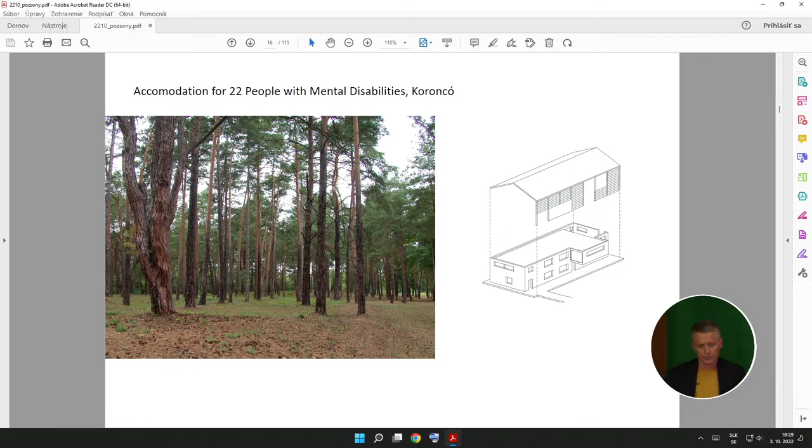Here you can see the floor plan, a very simple one. We have taken the porch and extended it into the height, so it's 2-story height. And we even made some distinctions - for example, a protected one with a lattice in front of it, and a semi-protected and a not protected space.

It is quite interesting to see that people have used the protected space in a different way, and the not protected also a different way. And we did a small thing - we put here a commando station, the living room, so people could watch the other ones, what is happening there. So it was quite funny. I have to tell you that after 10 or 15 years, the building has been exactly the same as what you see here, so people have cared about their building very much.

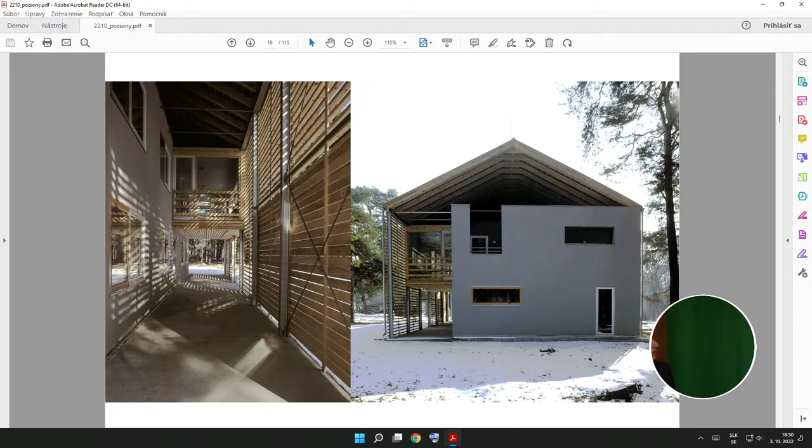Here also are still modernistic features, let's say, or we said no to the pitched roof. We have some kind of abstract element, but here the porch and this roof is quite different. So the goal was to do something different out of traditional elements. And this is how it is in the small forest. The second one is a competition project.

We haven't won. The day after we got up and did our business again. We did a third prize.

This is a deportation memorial for people from the Great Plain who were deported in the 1950s, and these are sheep yards - not exactly the sheep stables they had, only similar ones. They had different proportions, but the texture and materials are the same - that's thatched roof, actually. What we've done is alienate the form of those stables into a different one, but still keeping the same material, very simply.

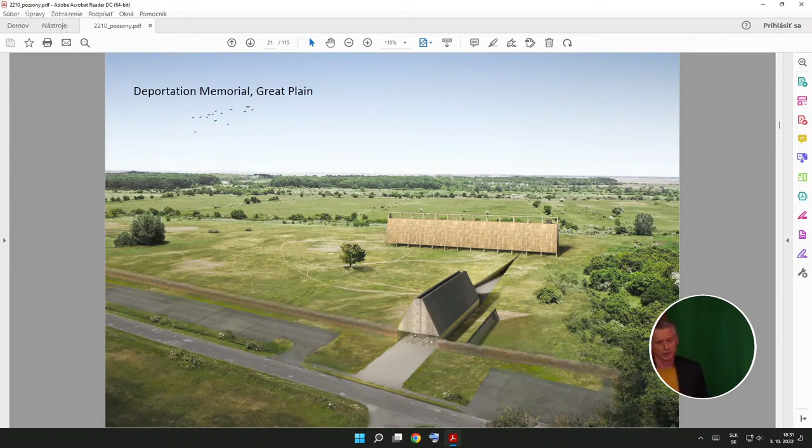What the jury said later - I had a friend in the jury, and he said when he knew that we had done the project, that we were actually first, but then they said no, it goes underground, it's very expensive. So we came back down to third position.

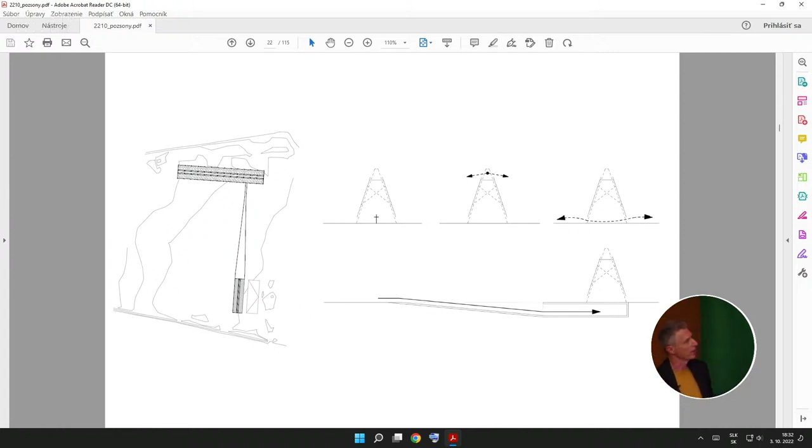So we have this building, and this part is actually an exhibition area, for just thinking, just remembering. And we have a technical building for, let's say, toilets and things to buy, and also a restaurant here.

And here you can see the section with the exhibition area. There's also what was questioned, an outlook, which we didn't understand, but you can go up and have a very nice view of the plain. You know what is about a plain? Nothing. There happens nothing, actually. But you can look out and see the nothing.

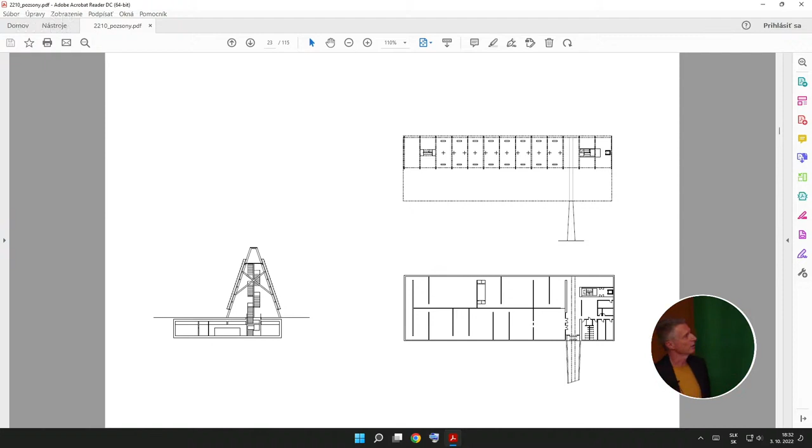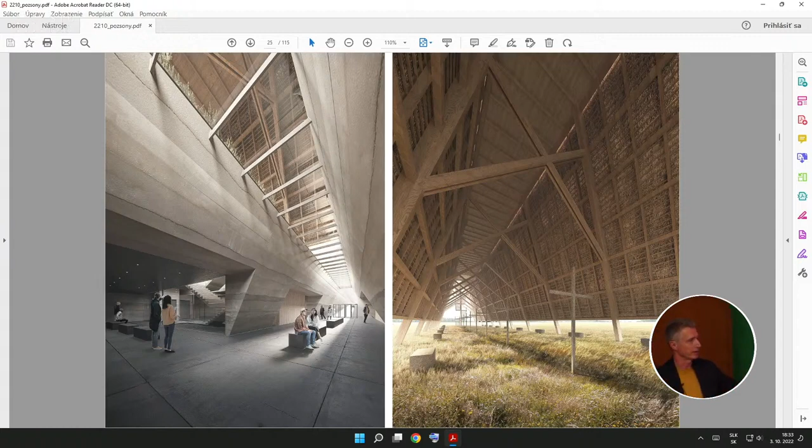And what we have put - this is our object, because it's rather an object - what we've put here is actually these crosses. We had 12 crosses because there were 12 such stables, not villages, but smaller plots with such buildings, with people who were living there.

And actually there was no railing, no guards, and they didn't flee. You know why? Because they couldn't go anywhere - everybody was afraid to take them in, to let them into their houses. So it was really a very bad era at that time, the 1950s, between '50 and '55 in Hungary, where people were taken away from their homes and put into such shelters.

Sometimes with their families, sometimes alone. And the reason, of course, was that they had some land before the Second World War. There was a very simple economic reason, because there was a shortage of workforce on the lands, and in such a way the state could have workforce in the lands.

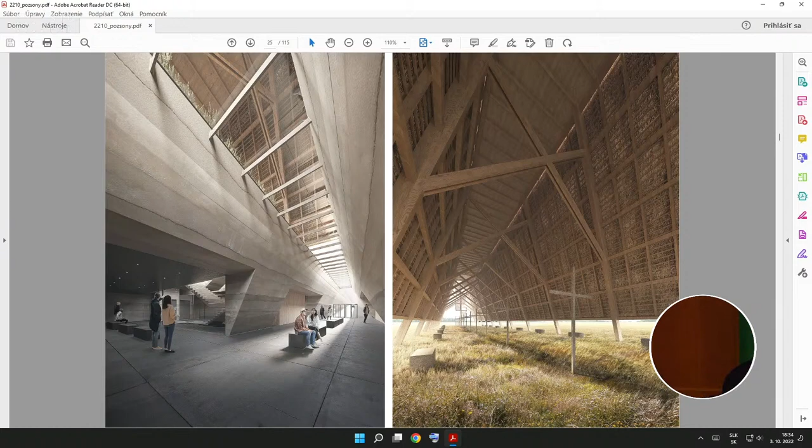And this is the reception area, the same form but different materials. Yes. The second topic for us is the intermediate spaces.

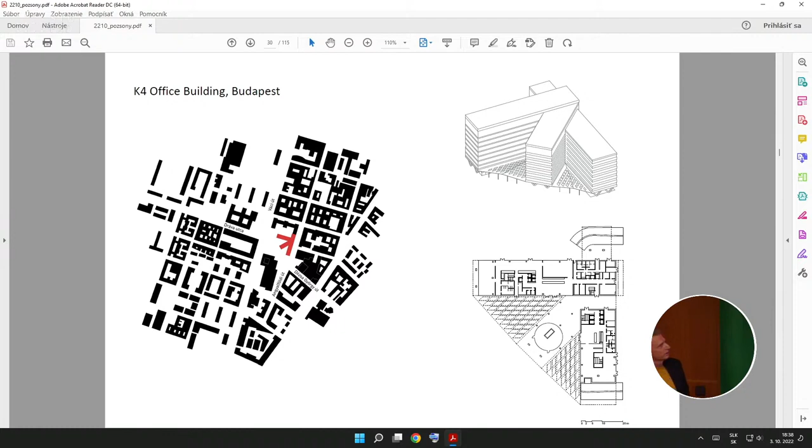It was actually the conspiracy with the chief architect, who said he needs this canopy. And we have done this canopy out of reinforced concrete, but with some holes in it. I'll show you how it looks like. This is the third element of modern architecture.

Now we come to our era. This is parametric design. It was not a conscious thing for us, we just started to play with it. Here you can see we have these rhombus holes, and we have the same holes on the bottom of this plane, but on the top it's always different. If you are at the edge, they are smaller because there's too much light, you need more shade. And if you come to the end of the canopy, they get bigger because you need more light. So it is a kind of design tool we use because it is needed, it has some sense.

And some very nice things we have developed in the meantime, that we have some indirect light, and these tilted surfaces are lit from the vertical surfaces. But you can see here.

And again, another topic, the context, this modernistic context. We have actually a building from the 1970s, which has been demolished since then. That's the usual story, that these buildings have no value. In my eyes, they have value, and actually our building was a reaction to it.

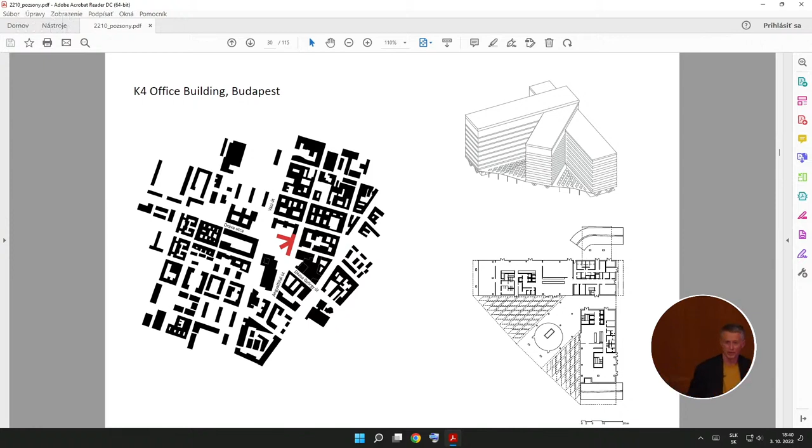Funny enough, the investors want to sell their product, so they call it vision towers - this is tower 1, tower 2, the 3rd tower. It has nothing to do with tower. But the reason we have used different heights of the ribbons is that they want to make it different. We thought about how you can make these towers different. A very simple thing: you have glazing from the floor till the ceiling here, from the parapet to the ceiling there, and here quite a normal one, a cheap one. Of course, this is for KPMG. This is for the cheap clients.

It's quite funny that architecture can be ironic. This is full of irony. So think about irony when you make your next project.

Okay, this is a quite interesting project we have done. It is an invited competition right now, we have won it. But since we have a problem with our economy, everything has been stopped. There is a shortage of workers, manual workers, masons, plumbers, and so on.

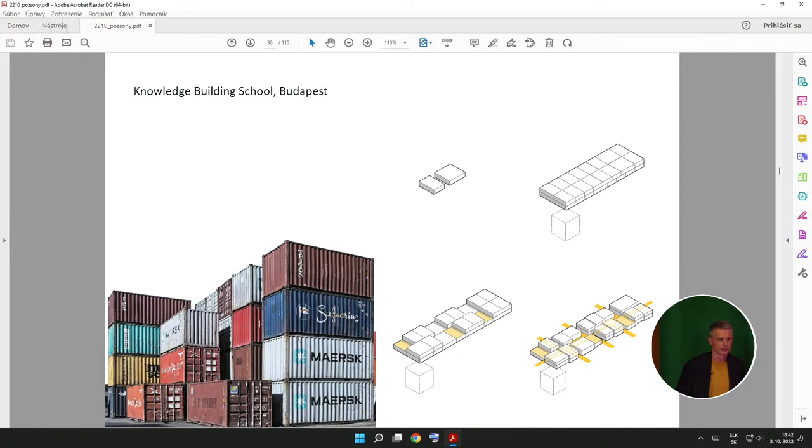Some construction firms, the big ones, thought, okay, we are going to make a new vocational school, called the Knowledge Building School. They made a competition for that, and they need finance from the government. We didn't think about it at the beginning, but we have done transitory spaces here. The very beginning idea was that we use something these people are going to use during their whole life - these containers. You can imagine a construction site with a lot of containers, with people sitting there thinking about how to construct it more effectively or more quickly.

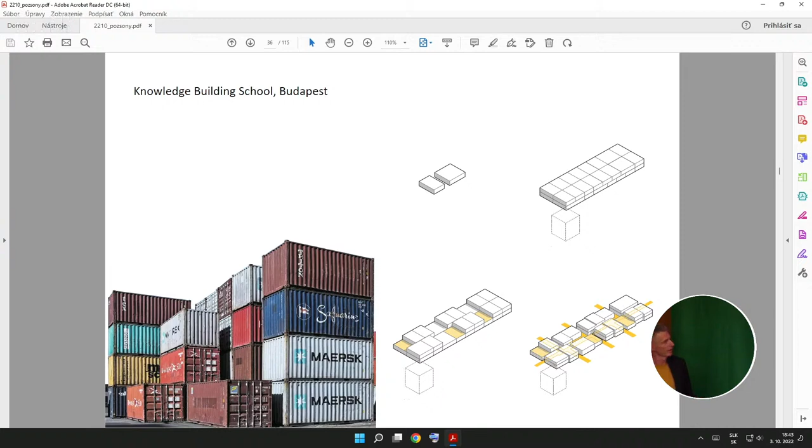So this is actually the beginning of our idea. We put all these containers together, like here, then took out a few, and pulled them apart. These containers are actually classrooms, office rooms, and downstairs we have workspaces. They are not the same size, not at the same line, so they are not real containers. If you built a container city later as on a construction site it shouldn't be like that, but they are learning how to build containers.

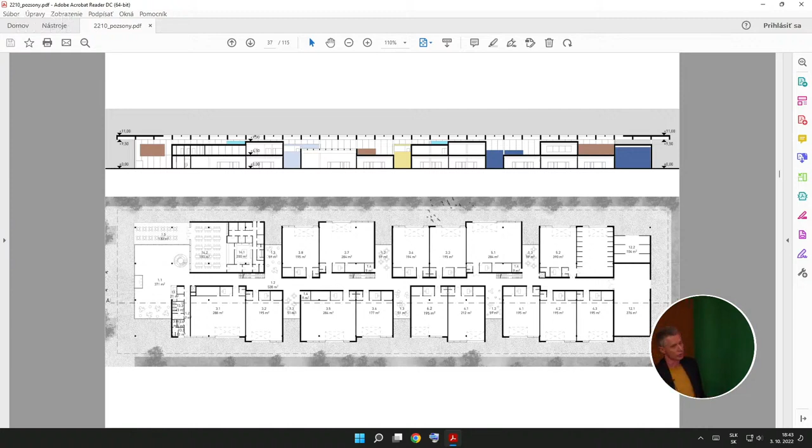And here you have actually an axis and smaller voids or rooms where they can chat with each other. In the height we have also a kind of play of intersection, what you can see here.

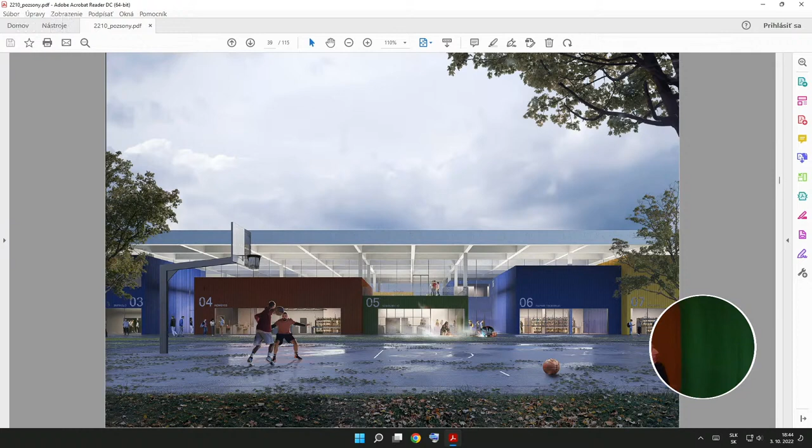And of course they needed a students' hostel, and this is a separate one. This is a very dramatic picture. Now we have come to the idea that if you want to win a competition project, you always have to make a dramatic picture. It is the 30th of June in Budapest, a huge thunderstorm you see here. The sun goes down. People are happily welding here because they love their métier, their future métier. Then these are basketball players, and these are some rather on the theoretical part and so on. You have wonderfully lit spaces. Perhaps this was the reason why we won the competition, I don't know.

This is the intermediate space where you can go through, and actually you always have different colors. These are corrugated steel panels or colored steel panels, and you have really a very varied situation with stairs, with voids, and of course to know where to go, which is your classroom, there are numbers and colors. We still have the hope that this is going to be built.

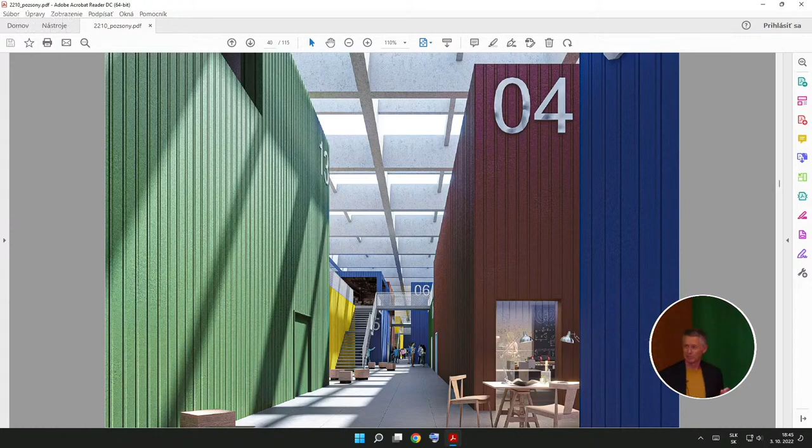The next project - I said last time during the lecture that this was an ideal procedure. This is the University of Art and Design, Moholy-Nagy, where the program was very well done.

I think it's very important that you have, as an architect, a very good program. If you have a very good program, then you don't have to think about architecture because the program leads your hand, actually. It has so much input that you have a lot of inspirational ideas. They had a special committee called MOME Laboratory, and they worked for 3 or 4 years to compile a program which actually contains the future of the university, a vision of the university, how it's going to work, what kind of challenges they are having, and so on.

And on the basis of this, there was - we say international competition, but all the international competitions in Hungary are national competitions because everything has to be submitted in Hungarian, and everything is thoroughly done, it's the same as in Switzerland, and I don't know how it's in Slovakia, but all over the world. So it was a competition, and happily enough, we won it, and on the next day we still had the winning entry, and funnily enough, we were commissioned. We were happy. Actually, I made my doctoral studies at this university, so I had some connections with the people. I knew them, and actually we started to work before we had our commission. So it was a risk commission, I would say.

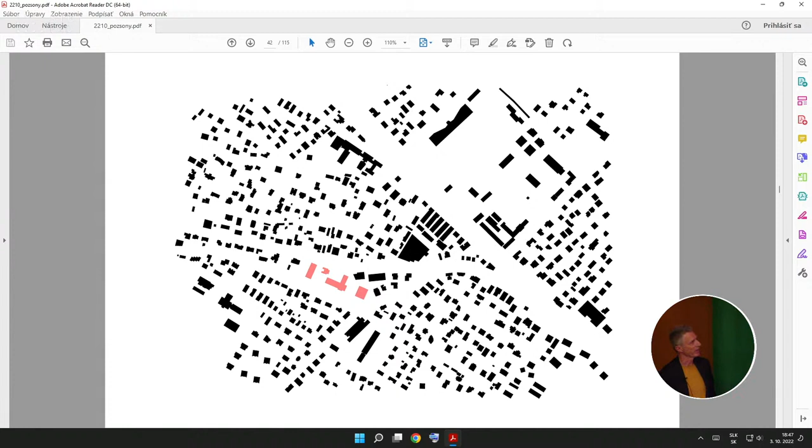And we had a task of making 3 buildings. One of them is existing. The other one too. Altogether 4 buildings. You can see the change of scale upon this building.

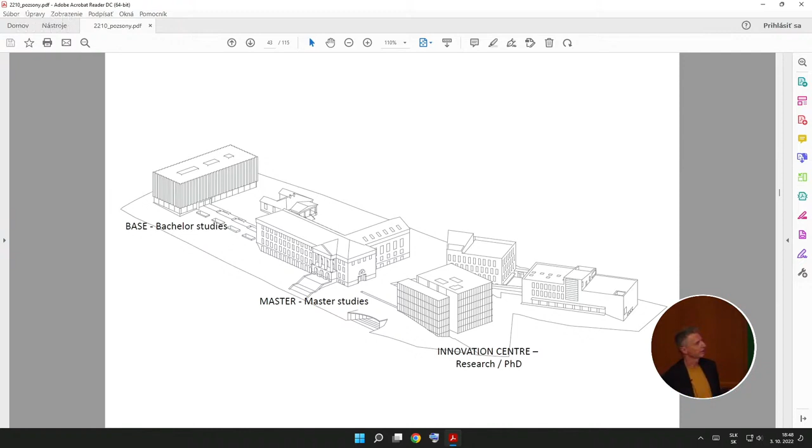This is a classicist building from 1840 or something like that, and there were just vineyards around. Then slowly a lot of buildings, bigger buildings and so on. And this one is the former People's College, built in the 1950s, 1953 as far as I can remember, in socialist realist style. I don't think I have to speak a lot about socialist realism in this building.

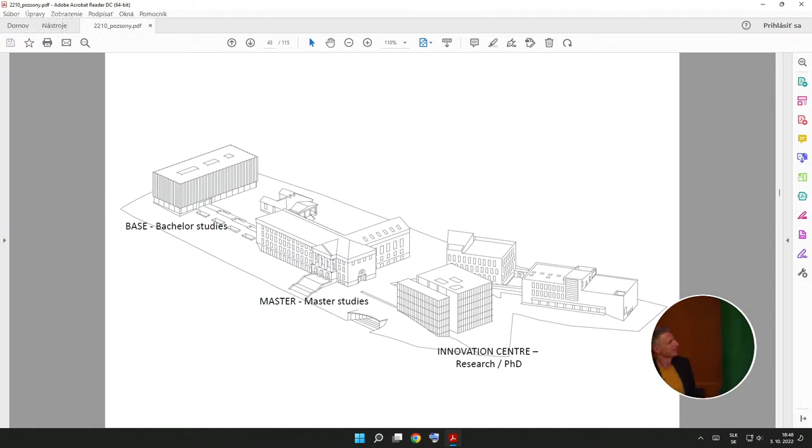And it has been also the home of the university for a long time. Then, according to the original layout, there was another building here, which was built, and another building here. It had to be demolished because it was in very bad shape and not quite well used.

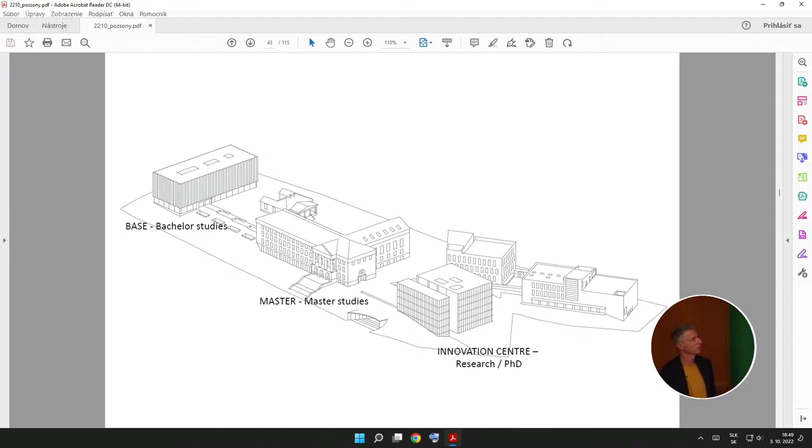And we had to extend this building with three other buildings: one for bachelor studies, one for master studies, and one for PhD studies. How we won was that we connected all the buildings with one axis, and they were connected also underground, because if an art student has something precious that has to be photographed, they could do it here and bring it elsewhere easily.

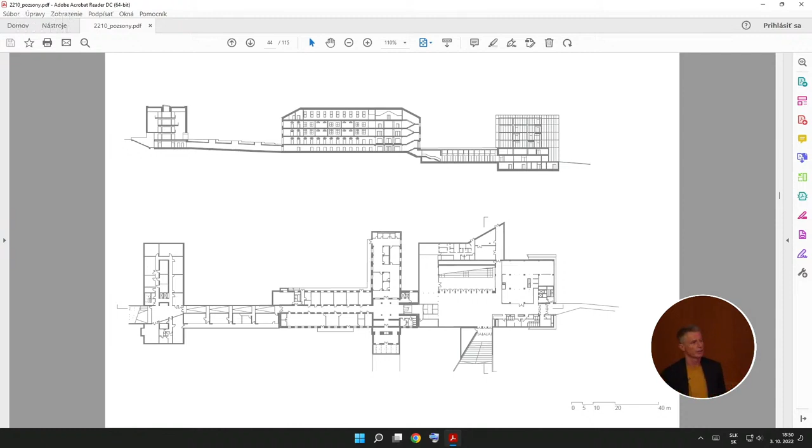There are two technical buildings already existing, so it's very practical if you can go through the building in a covered area. Back to our theme of intermediate spaces, this is actually a series of spaces, spaces of encounters on each side of the building. It's like a pulsating small city where you have small piazzas, small streets, and the chance to speak with people, meet people, and exchange ideas.

A very small detour. In the 1950s, architects were forced to make socialist realist buildings, but they were actually educated in a different way—they were modernist people, and they tried to find a way out. During the Second World War they were students or had almost finished their studies, and for the last years they went to Scandinavia, either for practical studies or normal studies. They were really infected by Scandinavian architecture, and how it started in Hungary was actually a very Scandinavian-influenced architecture.

I'm going to show a few other pictures later. This goes back a bit to Scandinavia, but also to Hungarian rural architecture—a very simple building with classrooms on both sides and a corridor in the middle. And we have turned everything upside down later.

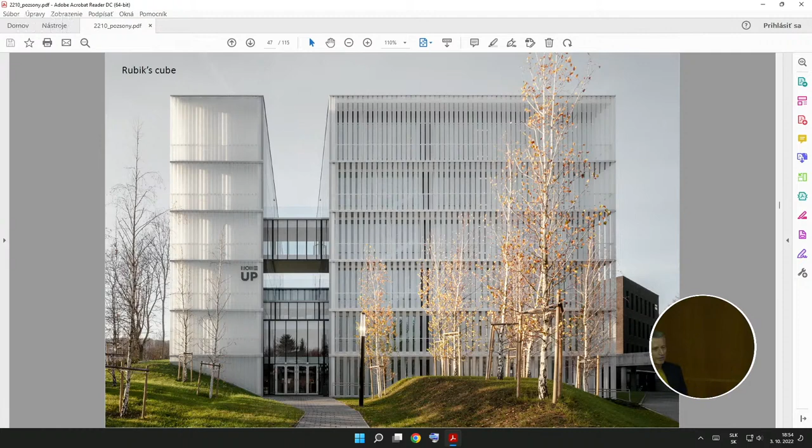And then we said, okay, we have something to do with these guys, with these important figures. We said, one building—this is the flagship building of the university—is for research, for the vision of the future. We said, okay, we make a cube, and you can even turn it, like a Rubik's Cube here. And this is actually the axis: you enter the building here, and you go along an axis, with these smaller piazzas and everything.

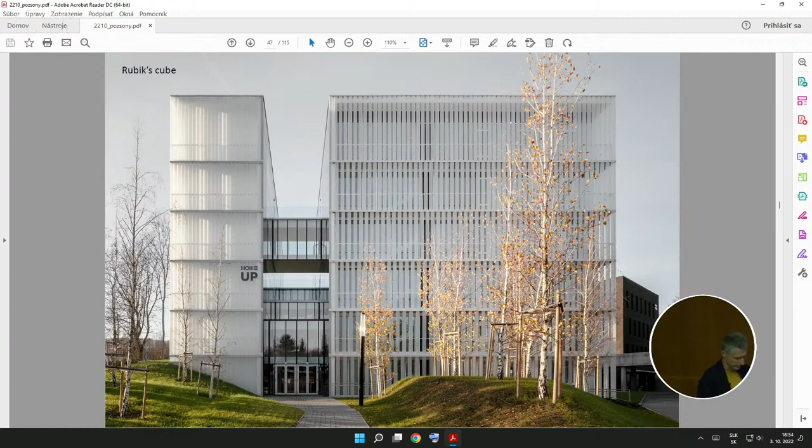What is following this axis? And the second one—we use this building again for Moholy-Nagy, referencing his light experiments.

He played a lot with natural light and artificial light, and with blurring of different objects, this kind of blurred vision. And we try to use the same with these cast glass elements.

How these elements reflect light, how they let through light in different light conditions, in different seasonal conditions, and even one mathematical play, what you can see here a bit, that we have smaller gaps upstairs, and bigger gaps downstairs. It's again because of light, to get more light here because there's less light here, and to have less light here because there's more light from outside. I hope you understood what I said. It's a bit complicated.

Our main concern was how is it from the inside, whether you can see, what can you see from the inside. Our brain is wired in a way that you can feel the whole thing through small slots or gaps. So everybody inside the building can fully enjoy the outside nature and the outside world from the inside. These are some amazing images for me, because I haven't thought that this building, a very simple building, has so many faces, let's say.

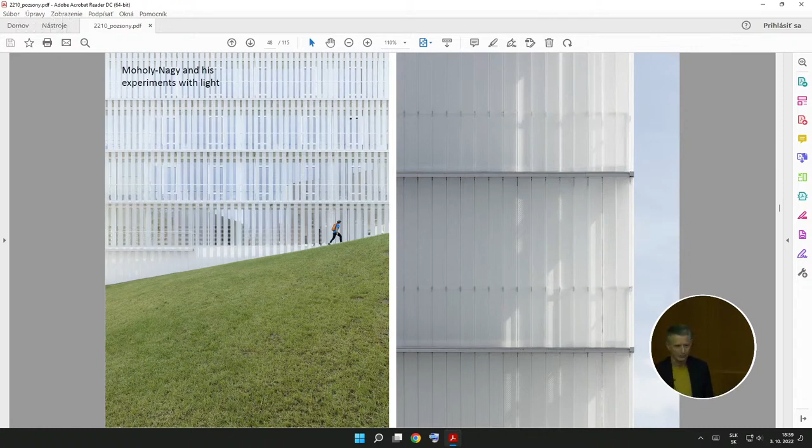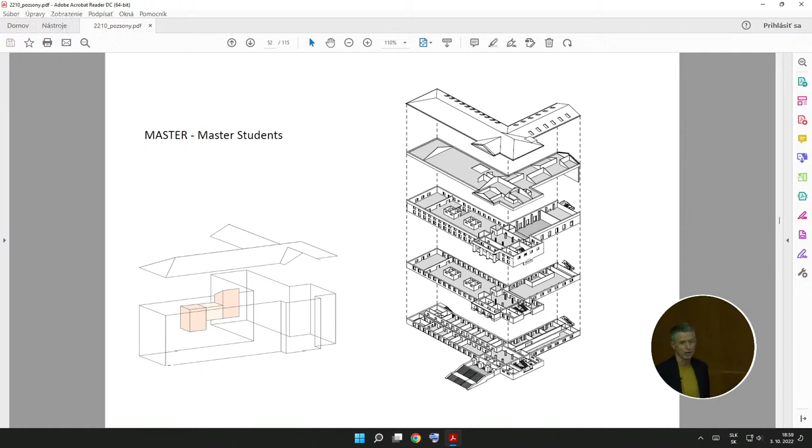After all that, we came to the building, and one interesting thing was what we tried to do in the old building, from the 1950s, is that we turned it, as I told you, inside out. It means that we have seized the corridors - there are now some boxes for model making and so on. And we have removed all the walls, the partition walls, which separated the classrooms. This is during the construction, when we already removed the partition walls, and we also removed a few slabs.

And I'm coming back to this axonometric view. So we have combined spaces, what you can have a thought about, and this is how it has become.

We had some stairs between the floors in order to connect the floors with each other, to have more communication between the students or among the students. This is the building which was above. This is the base building for bachelor students. We have other voids, we have studio rooms, and here we have the seminar rooms. Here, seminar rooms, and here the studios.

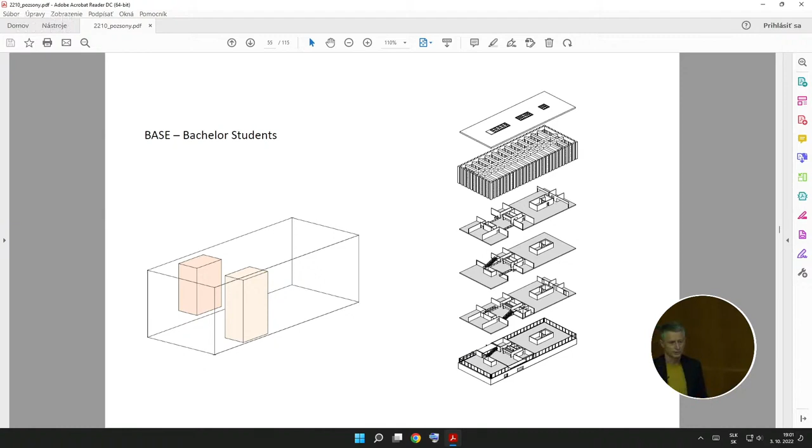One thing which is quite interesting, you can do it with no-investor projects, just state-financed projects, is that you can give out a lot of money without them noticing that you give out a lot of money. So we have made a suspended building. We have 3 cores, 1, 2, 3, and through these 3 cores we have these huge beams, and everything is suspended from all the floor slabs from these huge beams.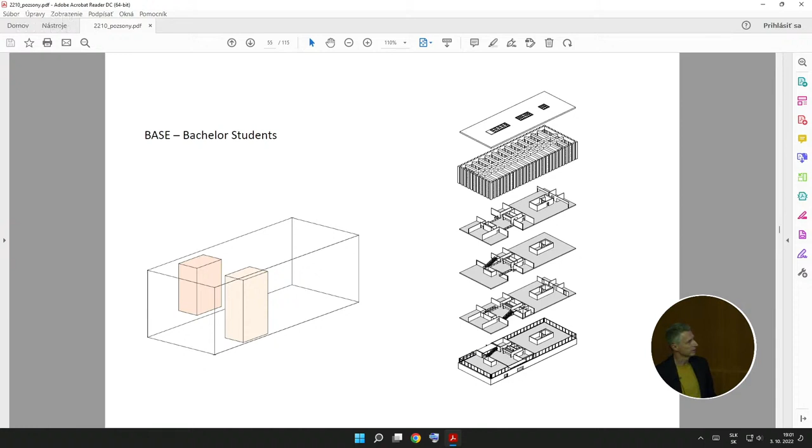And then we have a completely free story here on the ground floor level. Here you can see the beams, really huge beams. These are not pre-stressed, these are after-stressed beams. This was really a challenge for the statics engineer. Here you have the studios, and a really free vision or free sight of the outside. This is the space in between. You have the beams here, and this is actually a transitory space between the studios and the seminar rooms.

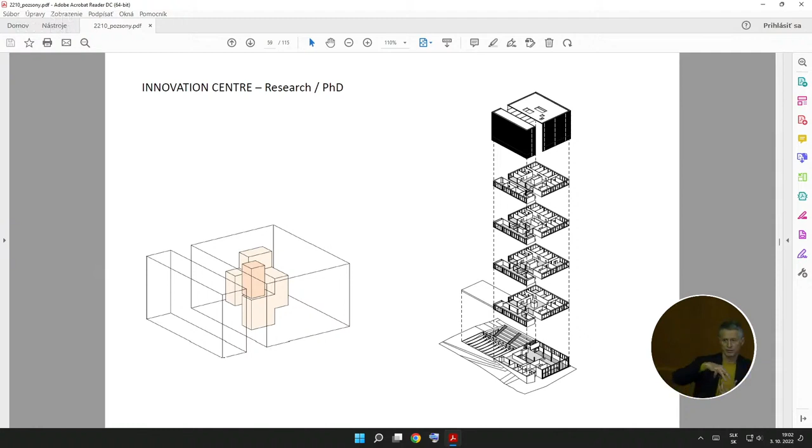And the third one, the so-called Rubik's Cube, the Innovation Center, where we have done another thing with the voids. We have turned them around, and thus we had another kind of void system, another kind of communication or possibilities of communication. This is the connection between the old building and the new building. We have a kind of flexible auditorium with a special fishbone beam system. The other side has an arena. This is the adjacent auditorium. This is the PhD or the Innovation Center.

And we had a very long discussion on the main entrance, since we are on a campus. We have 3-4 buildings, and we need a main entrance. We have an entrance which is like leading to the Capitolium in Washington, D.C., with a central building. What can you do? Then we have the Rubik's Cube, another entrance which is marked by the axis, but we still need our main entrance. What do we do? That's another ironical intervention, I would say. We go under the ground to make a different quality, thus making the main entrance. I don't know whether it's the main entrance. This is one of the entrances, and I like it very much.

Then the third topic, for me this is the return of the ornament. Us Hungarians, if I'm looking at Hungary or Hungarian art from the outside, we are actually very keen to decorate everything, a lot of decorations. If you come to Budapest, you have to study all the historical buildings, which are quite confused, turn of the century buildings, decorated till the end.

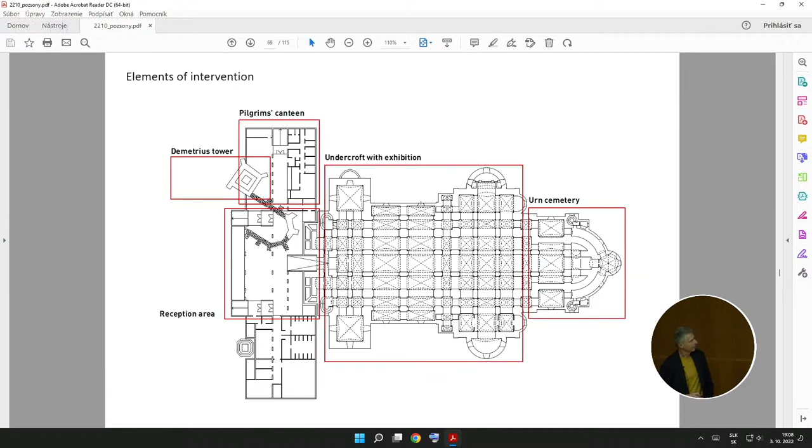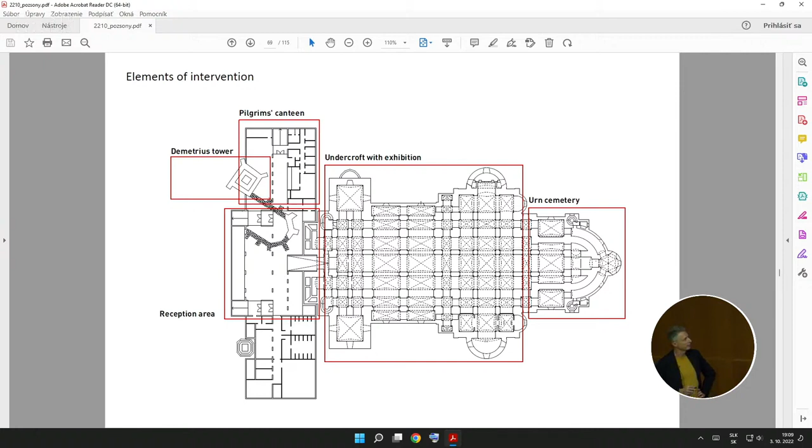Funnily enough, there was a church which remained. This was actually a Baroque church, but nobody knew what was inside it. There was a long discussion about where to put the new cathedral of Szeged, and they said, okay, we demolish the Baroque church and put it here. That's why we see this quite strange angle between the two churches. They started to build a church, and here there was still the Baroque church. It was an Il Gesù type church. There are two pieces in Hungary - this one was one of them, and the other one is in Győr, a Benedictine church.

As the building process proceeded, they demolished also the towers. There was one tower, and even one of the greatest writers of that time tried to defend the church on top of the ruins with his own body, but he didn't succeed. In the end they came to the core of the church, the core of this tower, and it turned out to be a medieval tower, a 13th century tower. Then after excavations, it turned out that some parts of the foundation of the church were found. So it's an extremely complex situation right now.

This is, I would say, a kind of wandering church. It moved from place to place, because the two towers were here. One of them has survived, but the church itself moved from here to here. This is the 14th century state of the church, so it had to be integrated.

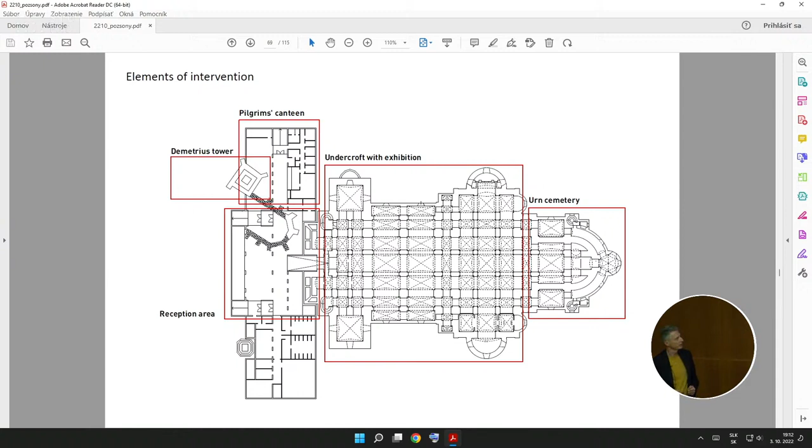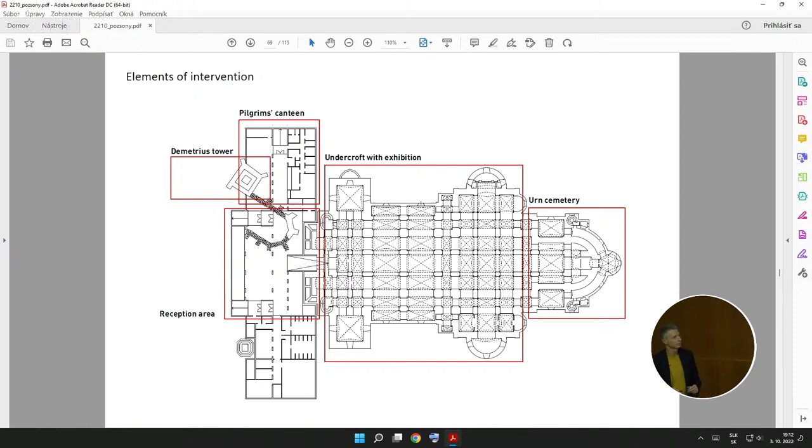But one thing was the church, the Demetrius Tower. Then we had - this was a former wardrobe and cloakroom of the opera singers, but they couldn't stay here anymore. This was the reception area for the church, and there was an unused space, the undercroft, which was used for exhibitions and conferences, and also the urn cemetery. You have to know the urn cemetery is a very good business for the church, so it had to be replaced, and of course it's extended to some extent. So this was a task - it had to be rebuilt, it had to be renovated, it had to be dealt with somehow. We didn't know how. We also had to deal with the Western Tower. So it was really very complex.

Here are the floor plans, and these are the spaces. They are really magical spaces, I would say. Who can build something like that nowadays with so many bricks?

Actually, we wanted to show the bricks. It's a huge brick structure, but they were in such a bad shape that we said, no, we just have this rather abstract picture of the building.

This is the tower, also very interesting to see. It was built - the building started in 1913, and in 1914 stopped because of the First World War. Then it restarted in 1928, and at that time concrete structures were becoming widespread, but at the beginning not widespread. So this part of the building was built in a different way, in a modern way, but still the garment, the clothing of the building was still historic. So a lot of things, if you deal with historical buildings, are quite interesting.

This is the reception area as you enter, and here you can go to the undercroft.

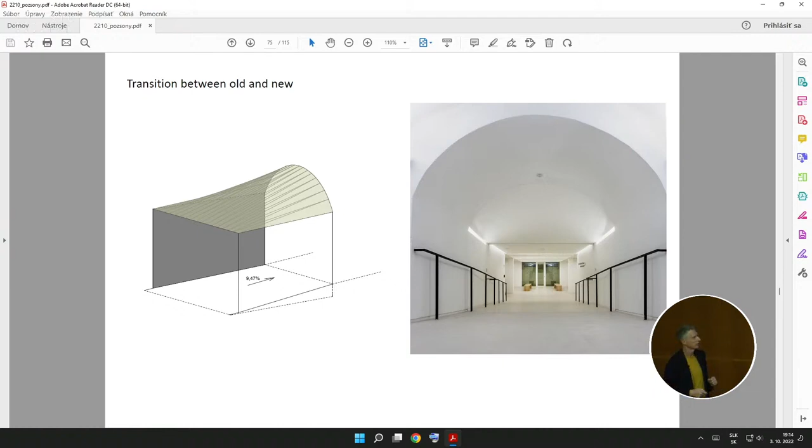Here we have a connection between historical spaces and the flat spaces, and we found a very interesting geometrical connection. It's a good thing to have a long process of design, because this had a different design at the beginning, but only in the end did we come to the idea of a fluent connection between the old and the new. This is from the new part.

There are a lot of stories when you deal with these old buildings. For example, the bishop wanted to remove the canopy from the apse of the church to the middle, under the cupola. Since it is one part with small stone mosaics, beautiful ones, it had to be put on rails to move it. You can see the column which was removed, only 30 meters, but in 3 weeks - it was really amazing. These capitals were also cast in gypsum in order to have better statical values on the rails, and of course a lot of dramas in between.

At the beginning, the construction firm said, okay, we make a cheap solution, we have 4 pumps, and we'll see how they lift the canopy. But then there was almost a crash, and they said, okay, we need just 1 pump - more expensive, but it can be lifted in a safer way. And since it came into the middle, we had to make an altar.

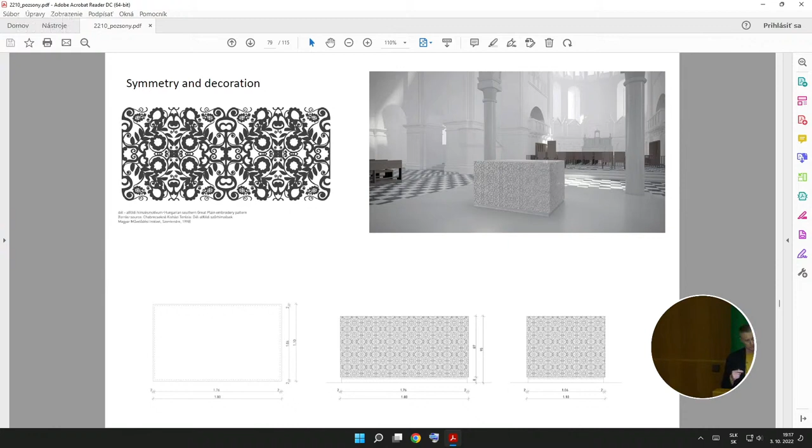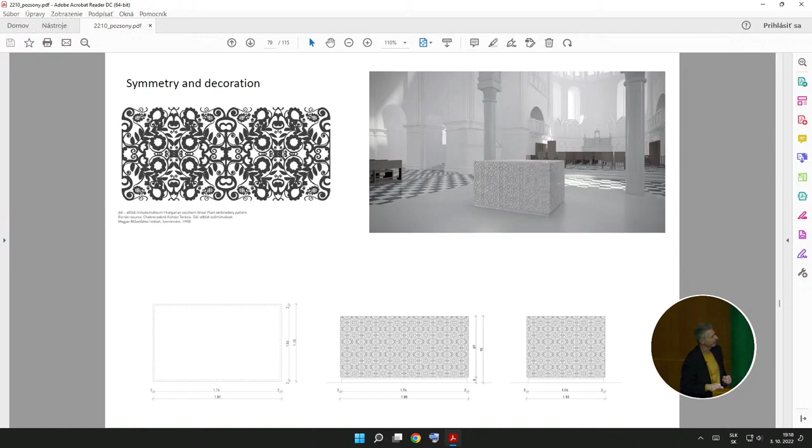What we have done is take a pattern of embroidery typical for the region, and then we made it more simple, consulting with a lot of firms about how to cut it with a water jet. We came to the solution of making a series of the same pattern, this simpler one, and how to make it round. It's very interesting when you make such a pattern - how you make the normal pattern, how you make the series, and how you turn around the edge.

At last we came to this altar piece. Just to explain how you have to defend something that is good - one of the chief architects of the church tried out, just as a joke, putting a lamp in the middle, thinking it could be funny to have light from inside. It was really hard work to get that lamp out of the altar, because it was really against everything. This is the pattern you can see, and it was important that it has a kind of handicrafted feeling, yet still you feel it's not totally handicrafted.

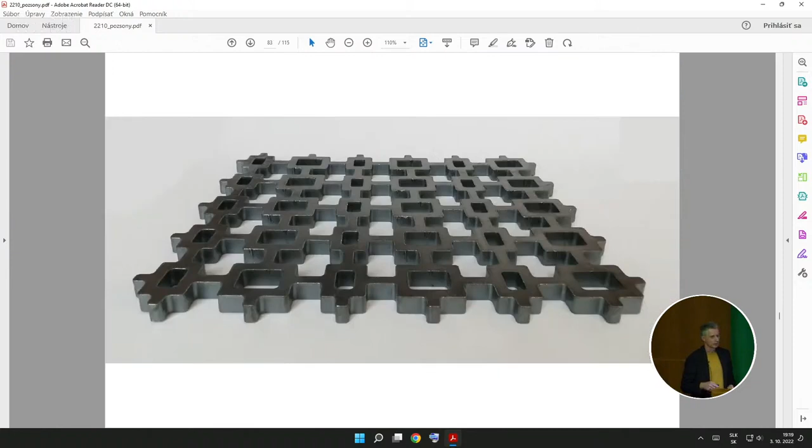Then another decorated part - I mentioned that the landscape architect who won this competition did a lot of things with a close relationship to landscape, and these are actually flower beds. We used it for the grills, for the air outlets around the church where it was needed. We simplified the pattern and used a different scale, but it was possible to make these kinds of grills.

As I told you before, it was a very long process, so we had a lot of opportunity to experiment. This is the entrance to the undercroft. This is the pilgrim's canteen, very simple, with some tiles behind. This is the Demetrius tower, which I spoke of before, and we wanted to hide the bricks because it was in very bad state.

Okay, and this is actually a kind of invention, this light. We needed it because of fire protection, some air inlets here to the undercroft, and these were the air inlets through the stairs. But it's also very nice that we have some light from inside to the outside.

Another thing we had as decoration, what we found here, was very little. This is a very important castle in Hungary. One of the main princes lived here. The Esterházy family is probably known to you.

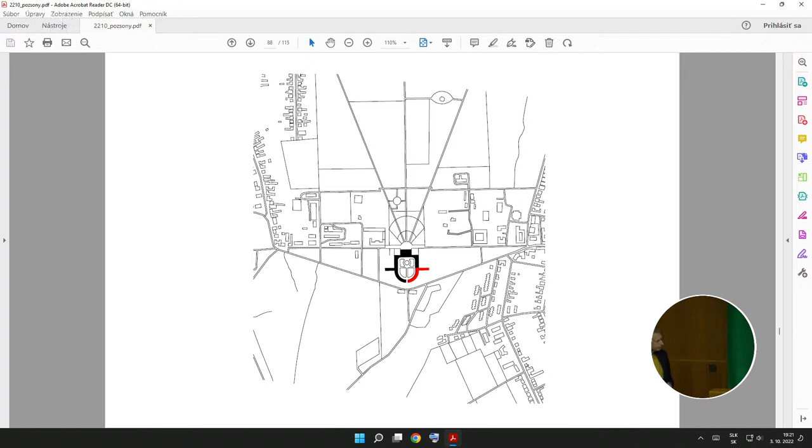But what we had to do is this part of the monument, the so-called horseshoe wing, and also the picture gallery. We knew there was a picture gallery here, but when the Russians came in 1945, they ruined everything, even the ceilings. We didn't have any literature, any marks, any plans of how it looked. So we were free to do what we wanted.

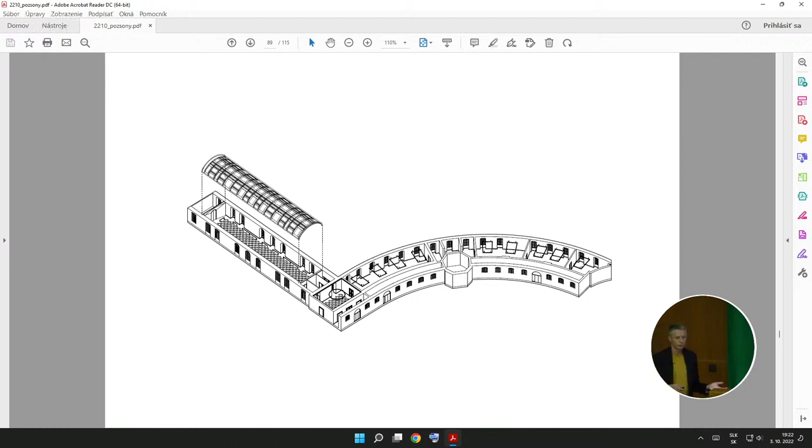We said, okay, we take something from this flat barrel vaulted ceiling, and we had some kind of reference. This happens many times in Europe in Baroque buildings, these coffered parts which depict, in churches, always some biblical events from the Bible. These are different here, in Palazzo Farnese, but they always have something to do with the sky, and the sky has to do with light. We said, okay, we take this abstract idea, we just take the coffered panels, and we just take the light.

And it's very practical because you are in a picture gallery, you need light, and you also have a far relationship with these Baroque vaulted images. Of course, because of the museum's requirements, we also need some special light and special air conditions. We have air inlets here. This is how it looks like.

Without pictures, now we already have pictures. Oh, it was quick. Sorry. And this, we also had no idea what it was like, so it's also a kind of play with three-dimensional flooring possibilities. This is the reception element, and we said, okay, illusion was very important at that time. So we had this reception desk, which is actually mirroring the surroundings, and also this chandelier with these glass elements, which were very typical at that time, with downlights that also reflect light from the ceiling.

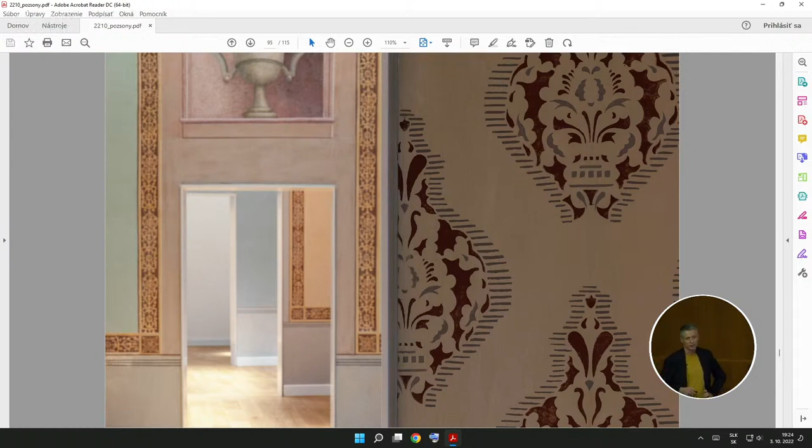This is the typical reconstruction, with some play here, since we had no traces of paintings. We said, okay, we change, we choose our own color. This was the bluish color, with the guys who did these paintings.

The aim was to have a seamless relationship between old and new, contemporary and traditional. This is our statement towards monuments: we do not want to explicitly show what happened in the past. We are not in a museum, we are in a building. We have to make a new unity out of these old elements, and we have to add something.

Okay, the last topic: space and light. Interestingly, space and light is very different depending on whether you have a light building or a heavy building. For example, here, this is a heavy building - an old Cistercian church in the northeastern part of Hungary - and this is a Turkish bath in Budapest. You can see how light works itself through the structure, so it's totally different from this one or this one.

This one is from the 1930s and this one is from the 1970s. This light structure - light is coming through lightly, something like that.

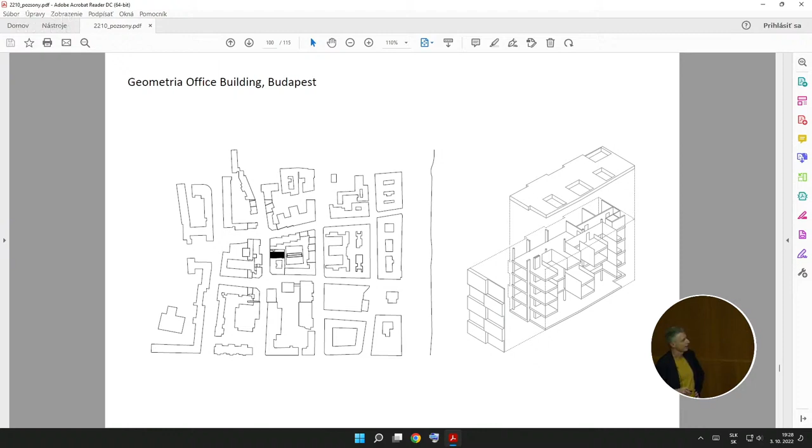So what we did is make an atrium with protruding cubes here, and here we have the row of offices, which you can see here. This is the atrium, and this is the row of offices - quite normal open offices, but I can't show you right now. And this is the ground floor - actually a very simple building.

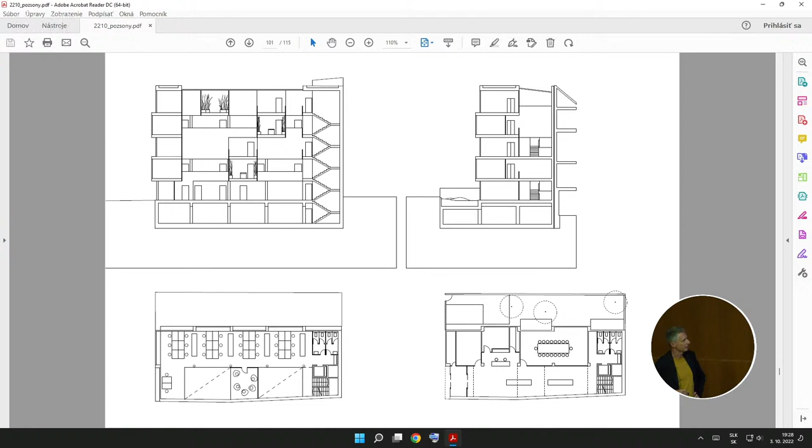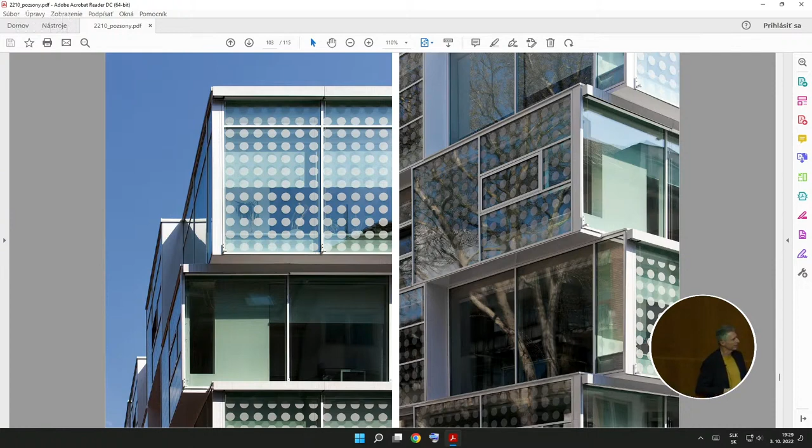We have open air and a very dense area here, with all the functional things behind. Since the name of the firm is Geometry, we made some play out of geometry and a connection with this building. This is made of brick, and this is also brick but a bit bigger, and this is made of glass. In order to make it more complicated - I tell you, I wouldn't make such a building anymore - it's so complicated and technically difficult that we worked really a lot on the construction side.

Another element that goes back to decoration is these small discs referring back to the 1970s. Our client likes the music of the 1970s very much, Beatles for example. It was over the 1970s.

This is the inside of the building. Mick Jagger, he was also 1970s. As you see, we have plenty of light - this is the atrium. If you look upwards you have a lot of cubes which are, I would say, hovering in the air. These cubes have kitchens or meeting places, and above them you also have meeting places. So on one side it's a very dense row of offices; on the other side it's very fresh with much air inside, and of course light.

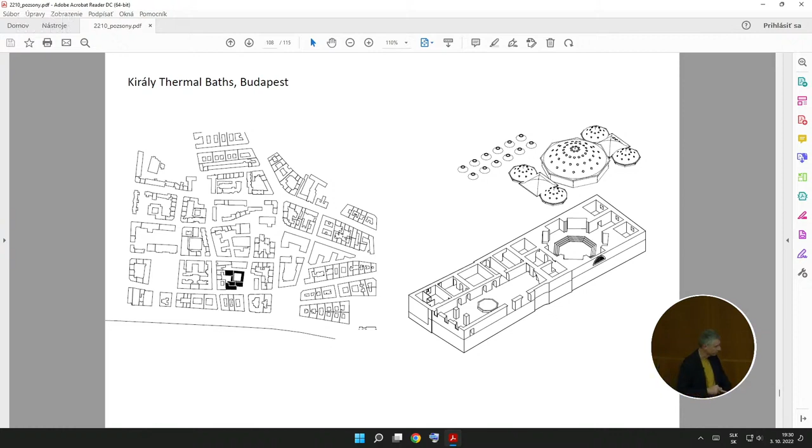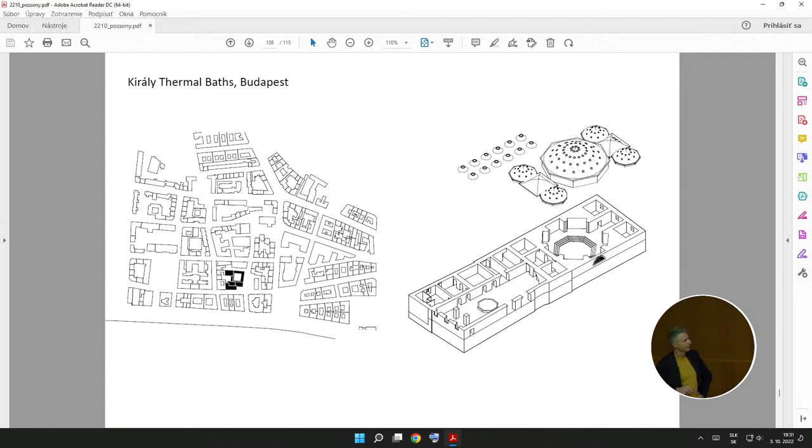The other project is a Turkish bath in Budapest, and this is how light comes through heavy material - a very complicated situation. This is no longer the original Turkish bath; the Turkish bath is actually based on the Roman baths. We have three parts: the cold one, the medium warm one, and the very warm one - the frigidarium, tepidarium, and caldarium. We have the frigidarium and caldarium here, and this is actually a Baroque part, and this is the Classicist part.

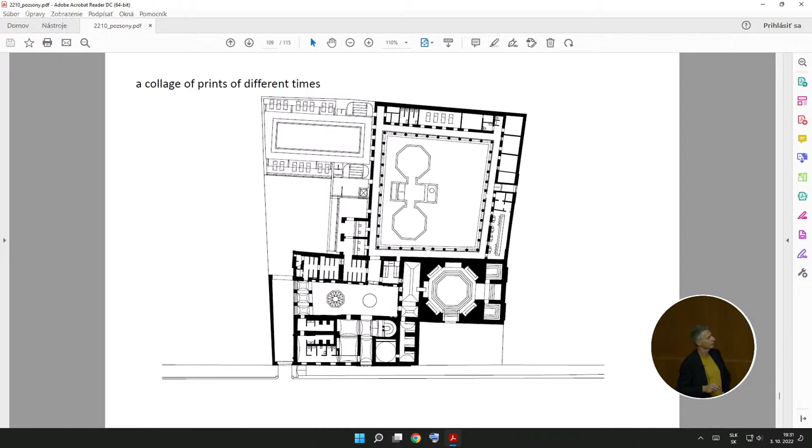To make a long story short, we inserted the cold part here into the Baroque part. We made some auxiliary spaces here, and a kind of extra space for extra purposes. We have the entrance here, done through here, and we have a special pool here. The theme was always how you tackle water - the experience with water, different states of water, for example steam, hot water, thermal water - and we have really very good thermal water here.

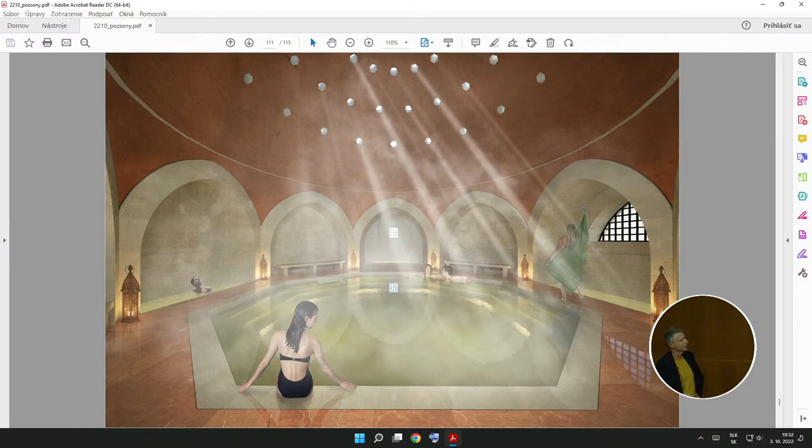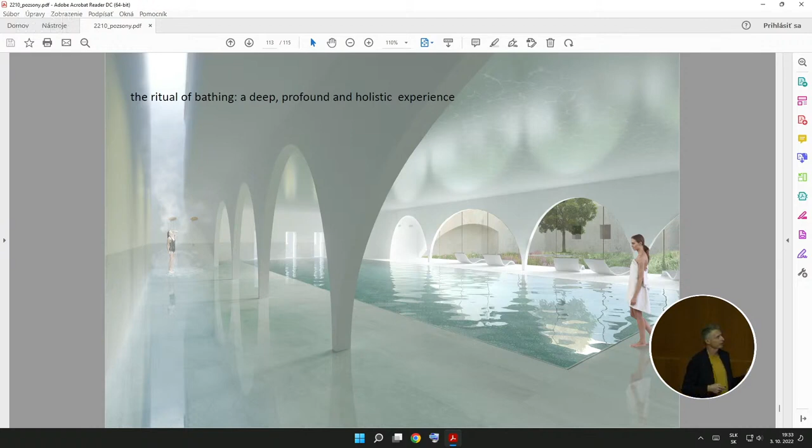This is the Baroque part, which we covered with a roof, and we have some cones through which light comes in - also a lookout onto the cupolas of the old part. This is the new part where we tried to have the same effect, some mystical light from above, and steam also. So it's not about efficiency - it's about enjoying water, enjoying being slow, enjoying being here with this historical surrounding. And on top, also part of the program, we made a sauna.

After this, I come back to the very first question: you have to change the world. What are you going to do? Thank you very much for your attention.